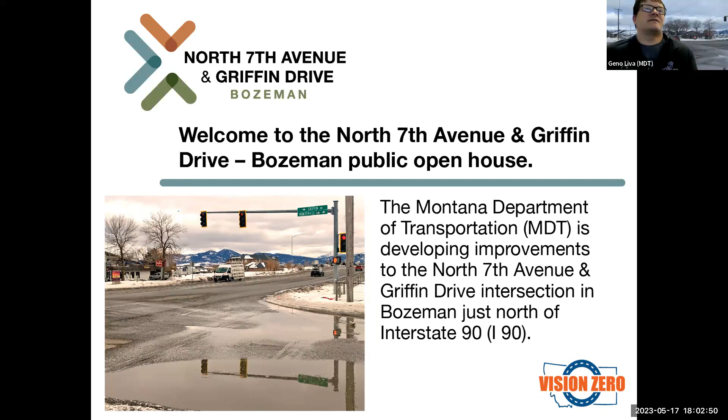Thanks. Hi, my name is Geno Liva. I am the Butte District Administrator for MDT. MDT's mission is to plan, build, operate, and maintain a safe and resilient transportation infrastructure to move Montana forward. MDT is looking forward to seeing the benefits provided by the North 7th Avenue and Griffin Drive project to the city of Bozeman and area commuters. We thank you for your participation in today's presentation and question and answer session and appreciate your interest and engagement in the project.

Before we begin our presentation, let's begin with a quick round of introductions with our project team members. Dave Cunningham. Hi, everybody, I'm Dave Cunningham. I'm with the Montana Department of Transportation, and I am the Butte District Construction Engineer. Paul Cogley. Paul must be having some technical difficulties. Ryan Keith. Hey, I'm Ryan Keith. I'll be an MDT inspector on site.

Josh McKenzie. Hi, my name is Josh McKenzie. I'm the project manager for CK May Excavating, the contractor for the project. Brandon Coates. Good evening, everybody. I'm Brandon Coates with RBCI. We're the public involvement contractors with MDT. We'll be helping the contractor with public engagement, public outreach, all the information that you're going to see today and the information coming out during construction. We're the main point of contact throughout construction. So we're here to answer your questions and help give you information to help you get where you need to go safely.

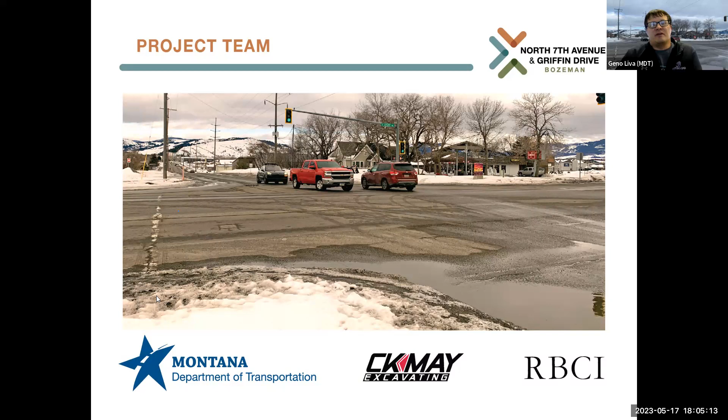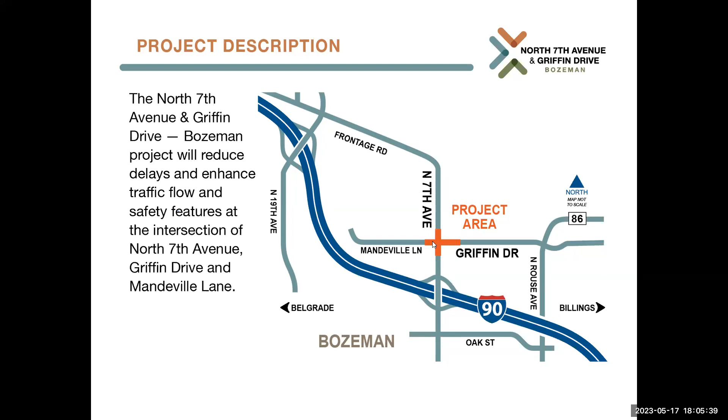Thanks, Geno. The Montana Department of Transportation is making improvements to the busy intersection of North 7th Avenue and Griffin Drive, just north of I-90 in Bozeman. The project includes reconstructing the intersection of North 7th Avenue, Griffin Drive, and Mandeville Lane. These improvements will reduce delays, improve traffic flow, and enhance safety features.

In 2019, an average of 18,380 vehicles a day used this intersection. The intersection frequently sees excessive congestion, traffic stacking, and wait times. New turn lanes and other improvements will enhance traveler safety features while decreasing congestion and wait times. The project will also reduce long-term maintenance costs and improve pedestrian and bicycle mobility by adding sidewalks that connect to existing pathways.

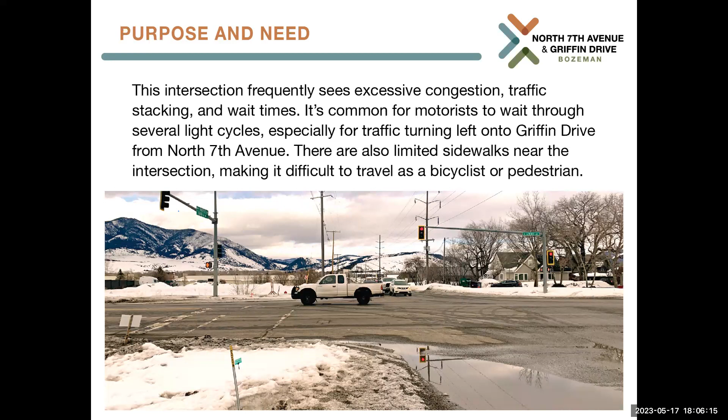Construction is anticipated to begin early June of this year and be substantially completed later this fall. Reconstruction will involve adding new turn lanes, durable concrete pavement, ADA compliant sidewalk, bicycle accommodations, curb gutter and storm drainage, and traffic signals and lighting. Additional work will include improving the approaches and relocating utilities.

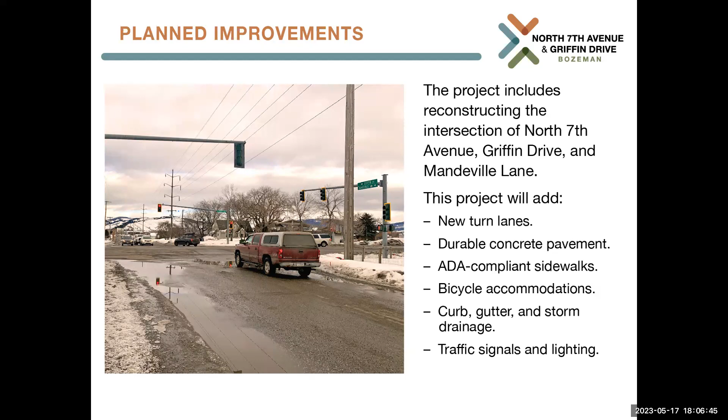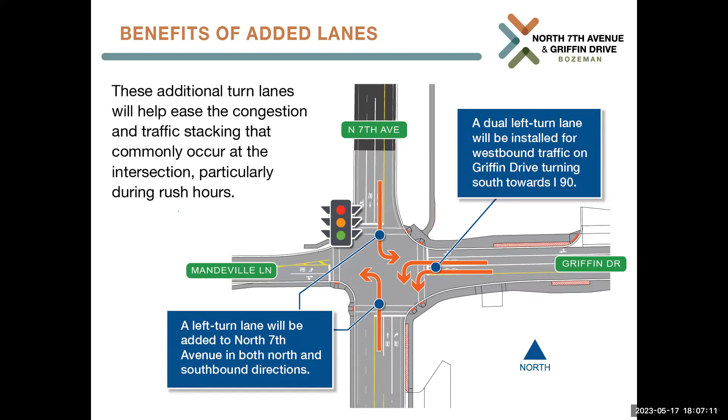A left turn lane will be added on North 7th Avenue in both north and southbound directions. A dual left turn lane will be installed for westbound traffic on Griffin Drive, turning south towards I-90. New turn lanes will help improve traffic efficiency and safety while increasing the capacity of the intersection.

Sidewalks have been planned according to specific needs of each part of the intersection. Sidewalks will be added on both sides of North 7th Avenue, and a bike lane will be added to the east side of North 7th Avenue. The new facilities will extend to Wheat Drive and Nikles Drive. A shared use path will be added on both sides of Griffin Drive.

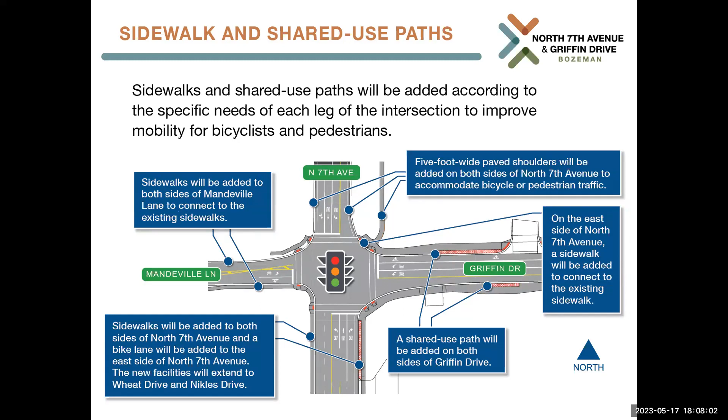5-foot wide paved shoulders will be added on both sides of North 7th Avenue to accommodate bicycle and pedestrian traffic. On the east side of North 7th Avenue, a sidewalk will be added to connect to the existing sidewalk. Sidewalks will also be added on both sides of Mandeville Lane to connect to the existing sidewalks. These additions will connect to existing pathways and sidewalks and improve mobility in the area for pedestrians and bicycles.

MDT has been communicating with city officials and area utilities to make certain that critical services will continue in the project area throughout construction. MDT has also met with emergency responders to ensure any potential emergencies in the project area could be responded to in a safe and timely manner. Next, I'll turn it over to Josh with CK May Excavating to discuss what to expect during construction.

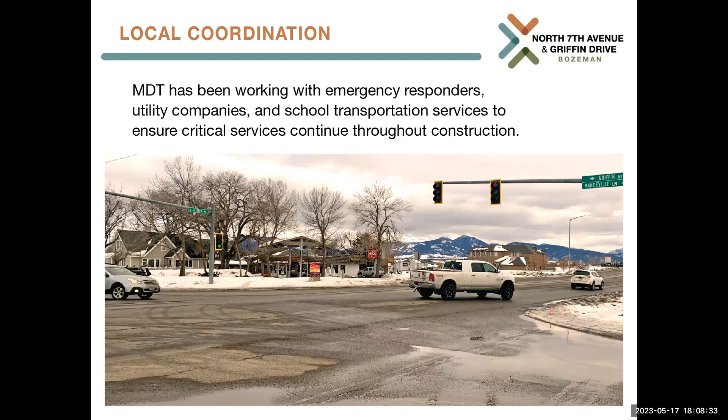Thanks, Dave. Hi, my name is Josh McKenzie, project manager with CK May Excavating, the contractor for this project.

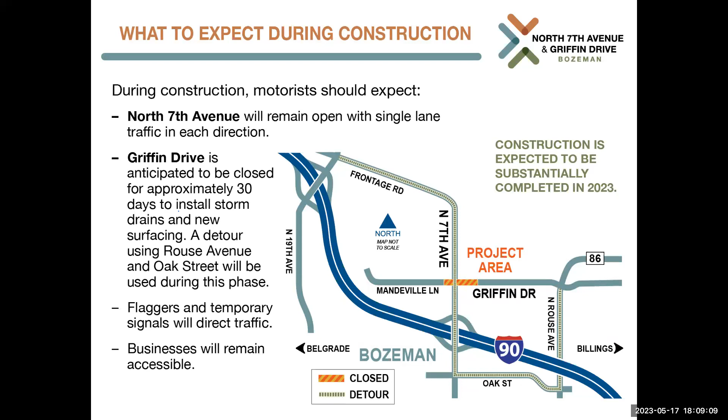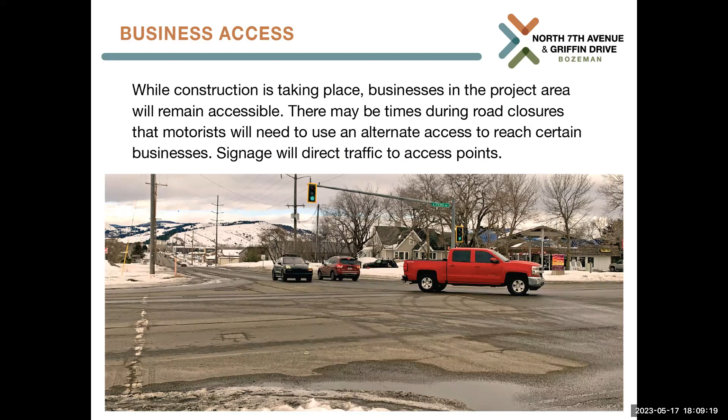Work is generally expected to take place between 6 a.m. and 10 p.m. Maintaining access to businesses is important during construction. While construction is taking place, businesses in the project area will still have at least one access that remains open at all times. Signage will direct traffic to the open access.

During construction, pedestrians and bicyclists won't be able to use sidewalks or bike paths in the project area. Please use alternate routes such as Wheat Drive, Nikles Drive, or Gilkerson Drive.

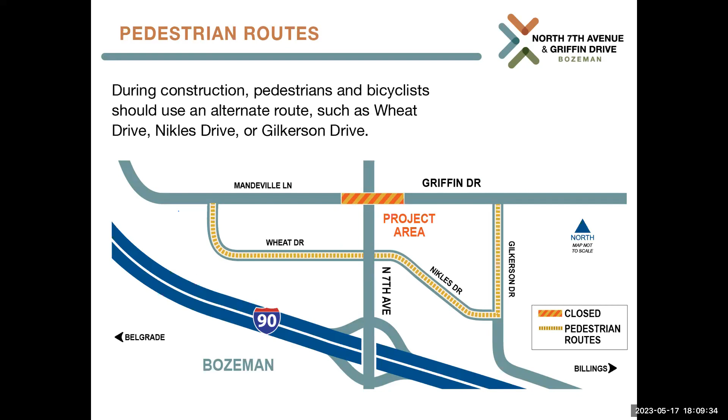Thanks, Josh. Keeping the public informed throughout project construction is a high priority for MDT. MDT is planning to use a variety of methods to communicate with the public during the construction of the project. These methods will include mailers, news media, social media, email, text messages, and updates to the project website.

Information to sign up for construction updates will be available on the next slide. Another tool for getting the most up-to-date information about construction and road conditions throughout Montana is the 511mt.net website and app.